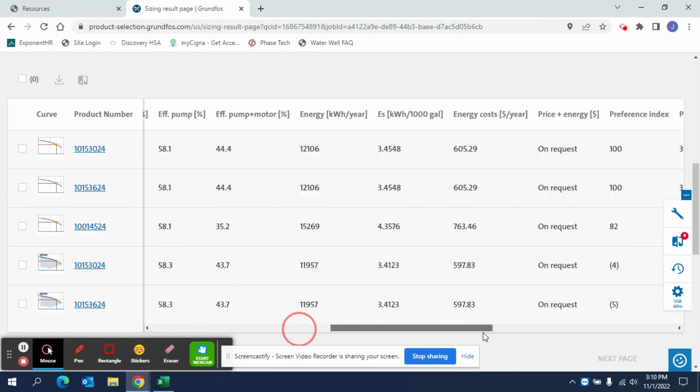But we're going to scroll over a little bit, and we're going to see here under phase. So we got different phase, 3-phase or single phase options. And so what that's going to let us know is, are we using a traditional system where we just have single phase and a control box, or do we got 3-phase power? And we're going to use a 3-phase motor, which is a little bit more robust, can handle more starts per day, or we're going to use maybe even a VFD, a variable frequency drive.

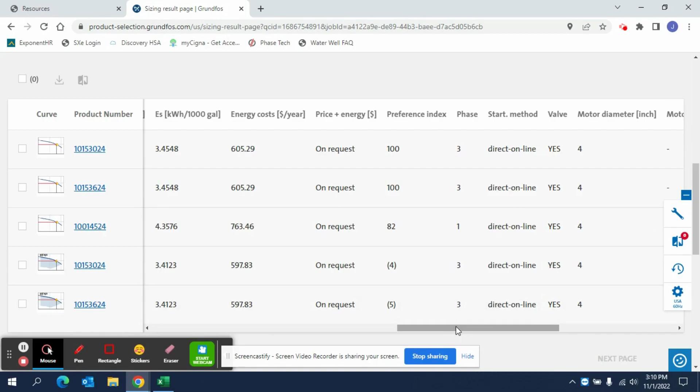So whatever option you select, make sure you select the right one. Like I said, it's not going to change the pump or the pump performance, it's just going to change some information on the data sheets that we're going to generate later. So for our application, let's say we're going to do 208 to 230 volt, and we're going to do 3-phase because we want the option to do variable frequency drives. So we're going to click here. And it's going to take us to the product information page.

So as you scroll down, it's going to default to your sizing results, and it's going to show you the curve. It's also going to show you where your design point falls on the curve. So up here in the corner, you can see that the closest it gets at full speed, this is a full speed curve, is 478 feet, and it's going to produce 16.5 gallons per minute. Now that's really close to our design point. So that's why it showed us the 5 best options were all the same pump, because this is definitely the best pump for our application.

And another thing we're going to look at here that kind of confirms that is, where do we fall on this efficiency curve? This is the pump efficiency curve. The second line here is a pump and motor efficiency curve. You can see that peak efficiency occurs somewhere around 15 gallons a minute, and it kind of starts tapering off after that. So we're peaking just under 60% efficient here, maybe 59. At our design point, we're at 58. So we're really close to peak efficiency. So that's a good sign that we are selecting the right pump.

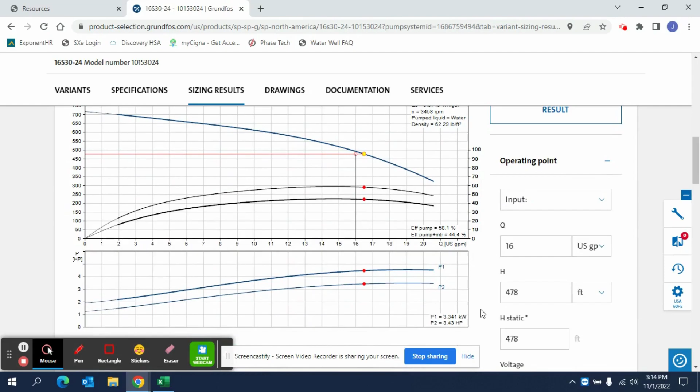So now you've got all this, and you said, well, this is at full speed. Well, what if I want to run it at a variable speed? What if I want to put a VFD on it? What does that look like? Well, we can generate and create a variable speed curve. So what we're going to do is we're going to go down here to show advanced options. Click that link there. It's going to pop up this window. I want you to select hydraulic layout. Right here under variable speed, select yes, select OK.

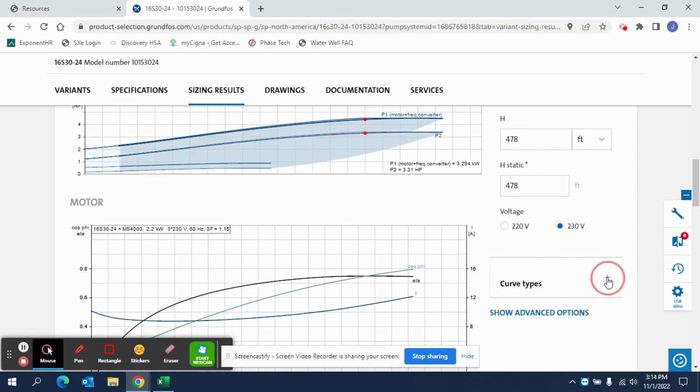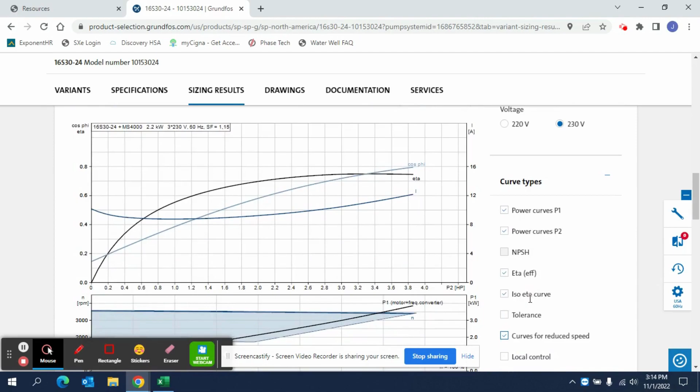The next thing you do is under curve types, click the plus button, scroll down, curves for reduced speed. Let's click that. So here you're going to see some reduced speed curves at different percentages of full speed. All these other lines, we're going to turn those off real fast. That's your efficiency there. So we're going to turn that off. So now we can simplify this a little more and see it clearly.

So now our information appears changed. Our design point is dialed in exactly, 16 gallons a minute, 478 feet of head. That shows us we're going to run at 99% speed to do that. So we can see here it's added a new curve for 99%, but it's also showing us a 90, 80, 70, 60, and 50%. So full speed, 100% speed is 60 hertz. 30 hertz is 50% speed. And then 75% would be our 45 hertz range. So from there, you can kind of figure out where you're operating based on those numbers.

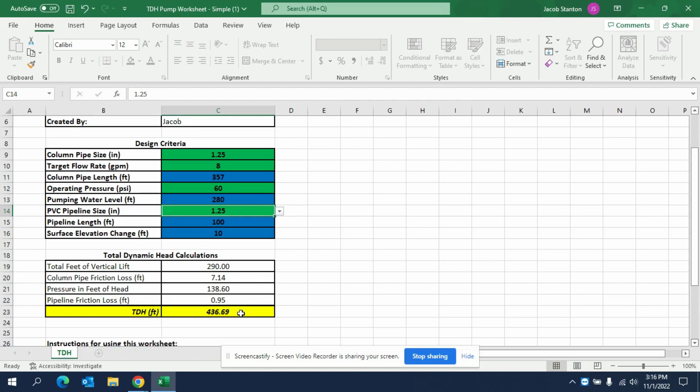So if you also wanted to see, well, what will this pump do at different flow rates? How will the speed change? Well, we have to adjust both the flow here and our head. So we can come back to our worksheet real quick. And let's say we want to know, well, what will this do at 8 gallons a minute? And at 8 gallons a minute, let's say we know our water level is now 280 because we're not pumping as much. So our pumping water level is a little higher. It doesn't pull down as far. So our new total head is 436.69. So let's round it to 437 at 8 gallons a minute.

We'll go back here and we can put in 8 gallons a minute and 437. Enter. And then it shows us at 8 gallons a minute, 437 feet of head, we're going to run at 83% speed. So now it's plotted the new spot at 83% speed, and it shows us we're well within that. We're still within this kind of sweet spot of the curve. We're not too far left, not too far right. We're right in the middle, and that's a good spot to be. And so we can see here and project what our pump is going to do at different flow rates, know what kind of speed to expect us to run at, and make sure that we have selected the right pump.

So usually what I like to do is look at the max, the 16 gallons a minute, and then figure out what's maybe the low end. What's the lowest flow rate we might expect? Is it 8, 6, 5, 4? And just kind of see where our pump is going to be operating. If you see that you're ending up too far left, especially on your low speeds, you just need to make sure that your pressure tank is sized properly to account for that, because you may create some cycling there. Or maybe consider a different pump.

But I think this is a really good pump for our application. It gives us a wide range of operating, and we're still at 80% speed, producing 8 gallons a minute. So we've still got plenty of bottom end if we need to go a little lower. So let's go ahead and set this back real quick. 16 and 478.

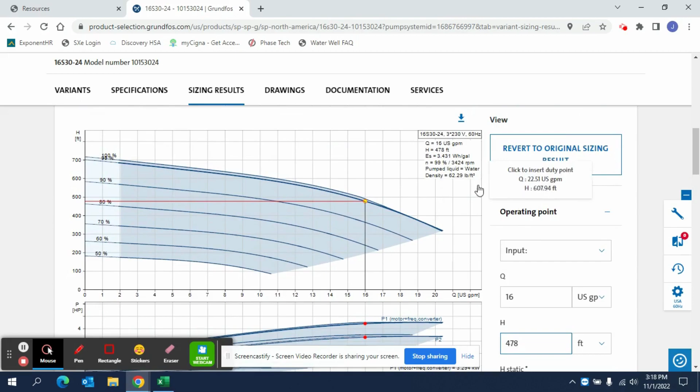Another thing I wanted to point out is down here at the bottom, it shows you exactly how much horsepower is required by that pump for your design point. So we have a design point of 16 gallons a minute at 478 feet of head. To do that, it requires 3.31 horsepower.

Now, the dirty little secret that most pump manufacturers don't want you to know about is that even though they advertise a pump as a 3 horsepower, 2 horsepower, 5 horsepower, whatever it is, depending on your design point, that pump could actually require more horsepower than what its nameplate says. So its nameplate is 3 horsepower.

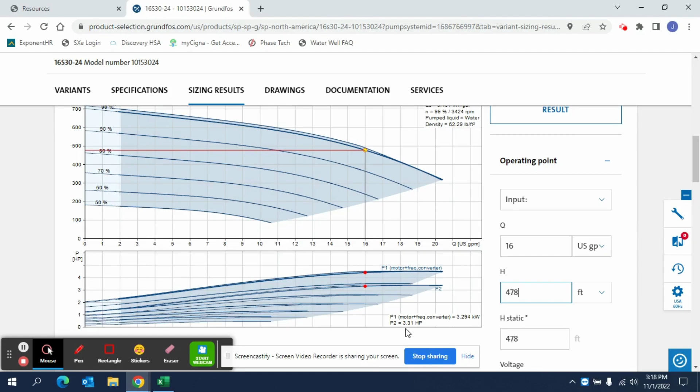With motors, submersible motors, we have a service factor. That service factor is generally 15%. You'll see it listed as 1.15 or 15%, meaning it can run at up to 15% overload and still be safe. So 3.31 gets us over our 3 horsepower full load. So we're pushing into that service factor range, but according to the manufacturer, we're still within the safe operating range.

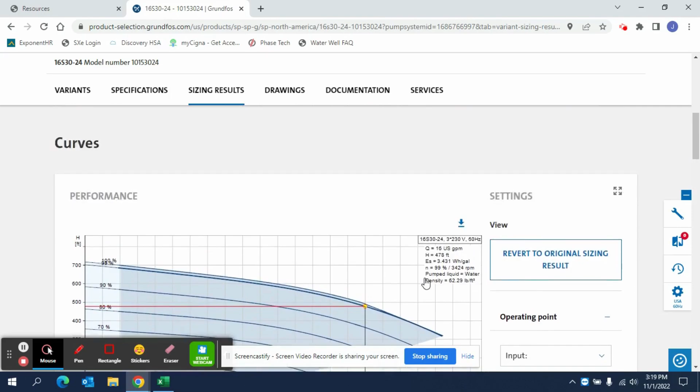So we've got all this done, and we know that this is our pump. So what next? Well, now we're going to save all this information. You can click here and see the drawings or the specifications, but we're going to save all this into a PDF so that we can provide it to a client, keep it for our records, and just have another piece of deliverable information to help set yourself apart, be a little bit more professional. So I'm going to go up here and click on Print PDF.

The first thing I like to do is go to the page and header setup, go to Company Page Header, make sure it's checked, hit Edit. Put company name, created by, your phone number, email, the date, all that good stuff. Click OK. You can even upload a logo if you want. Next, I'm going to go back over to content and check all the boxes I want. Some of these will be checked by default, so you can add or remove as you need. I like everything that's here so far, so I'm going to leave it as is.

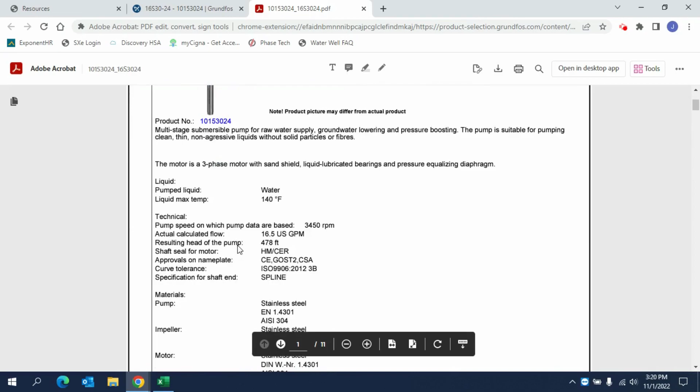And so now that we've got all that, we're going to come down here. Let me move this out of the way. And we're going to click Generate PDF. So now it's going to generate a PDF for us. You can see we got 11 pages. Gives us our model information, product number, all the information about the pump, our design point, specifics about the motor type, electrical information. There's our service factor I was talking about.

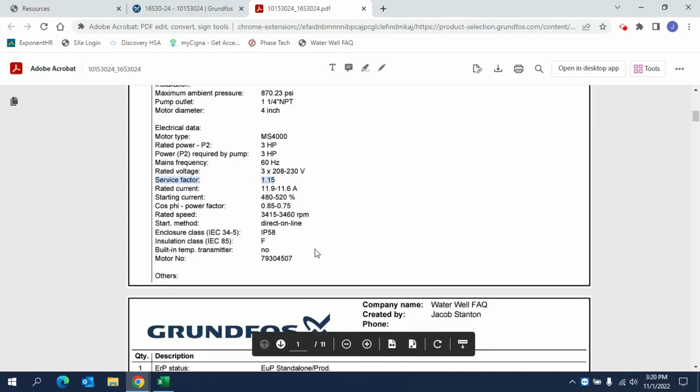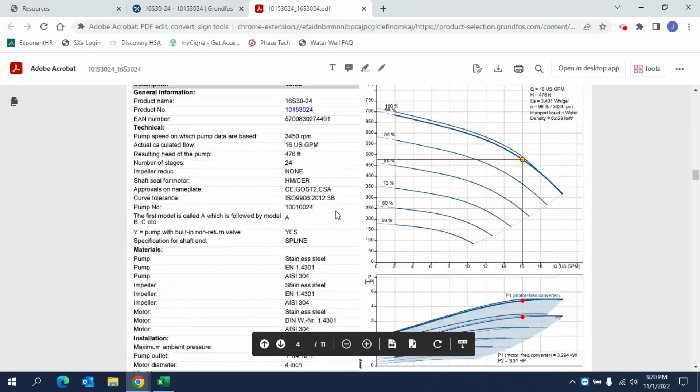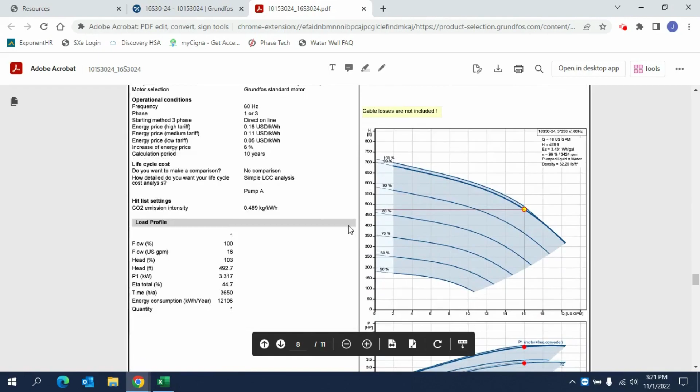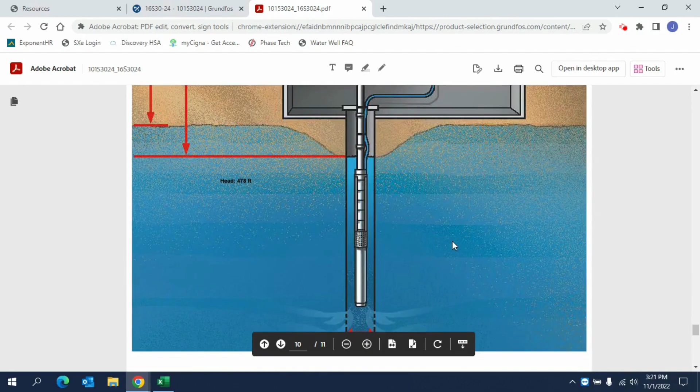Scroll down a little further. You're going to see our pump curves. Here's our variable speed curve with our design point plotted. Motor curves, additional pump information. This is all good information that documents the design of the pump, your design point, dimensional drawings for your pump, some basic wiring diagrams, some estimated operational costs, things like that. So you can see what to expect performance-wise out of this pump. Some nice color drawings here to show what the system's going to look like.

So now that we've got all this, we can come up here and download it, save it, name it whatever you like, and then print it. And then you have this to give to a customer, an engineer, or whoever you need to give it to. So that concludes our pump sizing video.

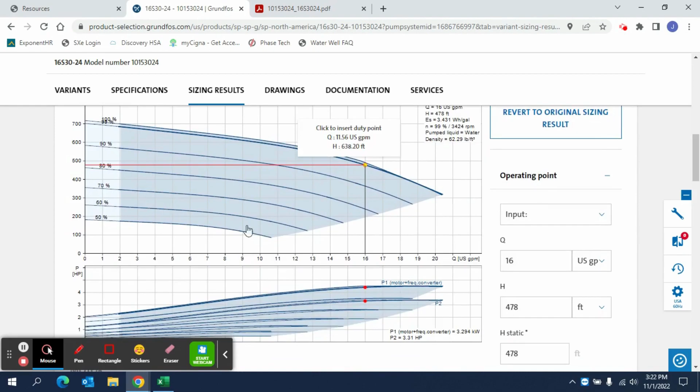As you can see, got a lot of good options. It's actually not that difficult. Once you have your total dynamic head and your flow rate, in a matter of minutes you can have sized the perfect pump and generated a nice PDF with a bunch of information in it. Generate variable speed curves or just a basic simple curve. So that way you know that you've sized and selected the best pump.